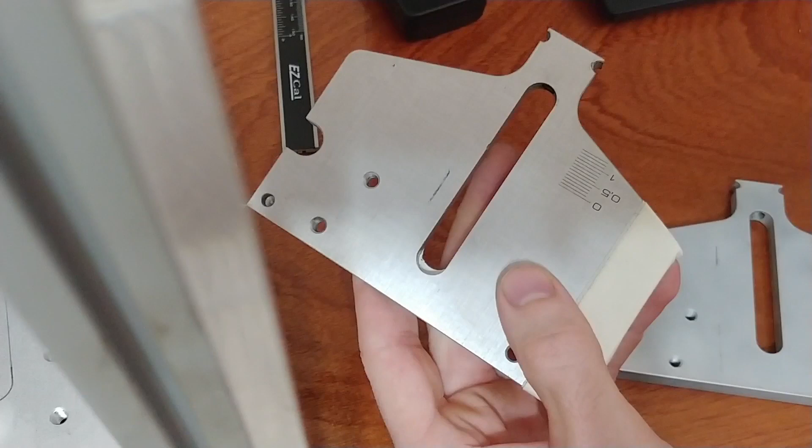I've got a small scale here that I need to mark. It's just a 10 millimeter scale plus a couple extra millimeters. You can see these lines are about 9 millimeters long and the longer lines are 11 millimeters long.

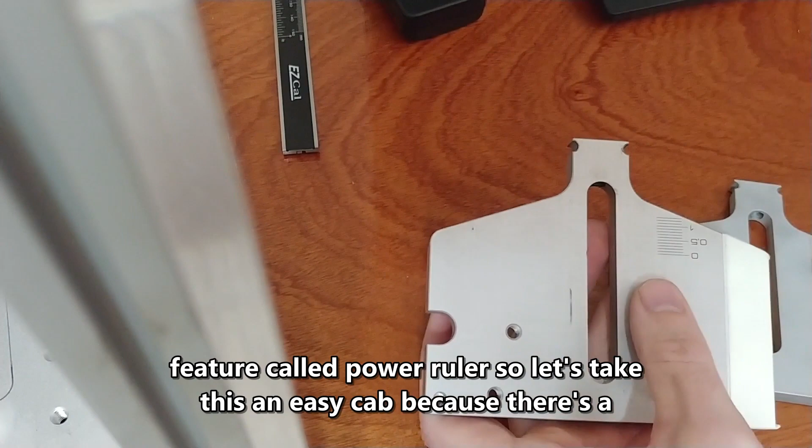So we can do this in EZCAD because there's a feature called PowerRuler. Let's take a look at that and see if it's easy to use or not.

So we go up to the laser menu and we go to PowerRuler, and then what pops up is this little grid. It's essentially a small workspace for EZCAD, with an object list on the left and an XY grid on the right. We have a couple buttons on top to start a new file, to open something, and these will be a .ruler file, so you can save whatever you do in this workspace.

You can click save if you make changes to a current file, or you can save it as a new file and open it later. You can also export whatever you're doing here into your workspace and get out of this little work environment, so you can add different vectors or whatever you need.

For example, for this thing I'm going to need to add a couple more graphics to it. There'll be a logo here, and I'm going to add one more graphic on it, but that's not going to be the only thing marked on it, and I don't want to mark these separately, so this is going to go to the workspace.

As you can see at the bottom of this little environment, you have the light, mark, parameter, and quit buttons, as well as a parts counter. So you could mark directly from here. I haven't had good experience marking from here so far, but I'm not super well versed in this yet.

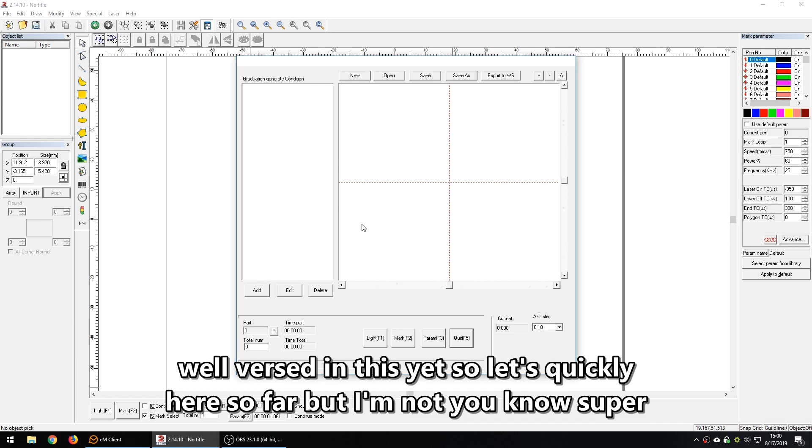So let's quickly look at how we can use this thing to mark a ruler or this little tiny scale. I'm going to do three things: make this scale and mark it, then make a little bit more complicated ruler and mark it, and at the very end make a disc ruler and mark that — that's essentially just a circle.

So let's start by adding some dimensions. I'm going to keep this in view of the camera so we can keep in mind what we're going for. I'm going to orient it exactly like this.

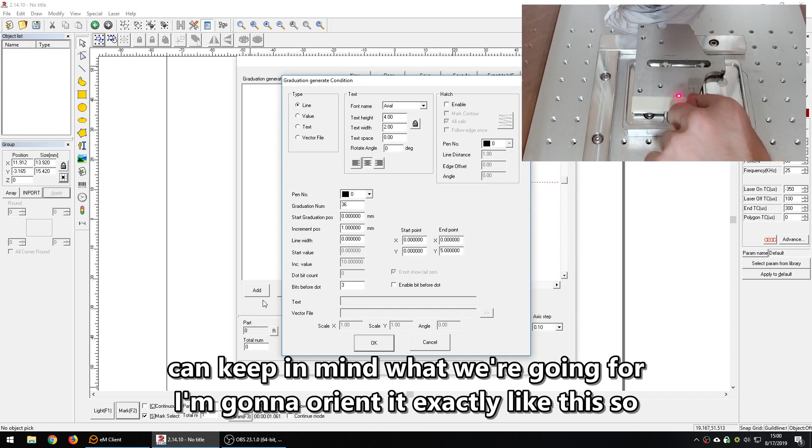You can see when we click on the add button, we have a big screen here with a bunch of options. But mainly on the top we have three boxes, one that says type — this is the type of graphic you're going to add.

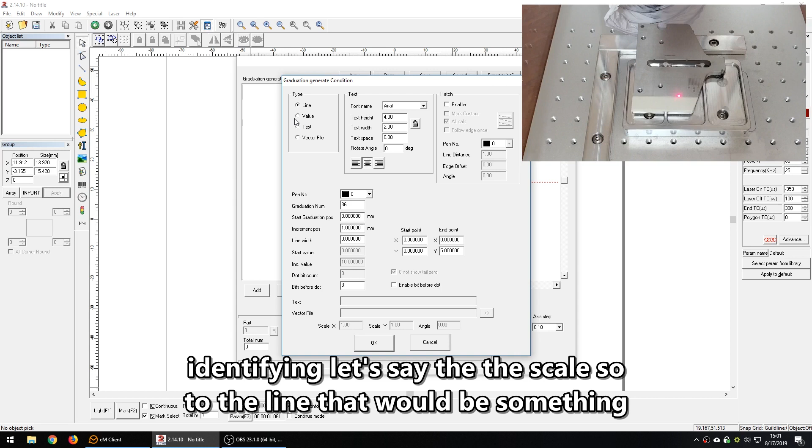Do you just want to add a line? Do you want to add a value to the line — that would be like a number, 0, whatever? Or do you want to add some text to the line — something identifying, let's say, the scale? So if you were making a scale for millimeters, centimeters, maybe something else altogether like bar, PSI, pounds, whatever, you can add that. You can orient it and change the size and the font of it in this second box.

And lastly, on this first box, you can add a vector file. So if you had a logo or something that you wanted to mark in addition, that you wanted to be part of the ruler, you could add that.

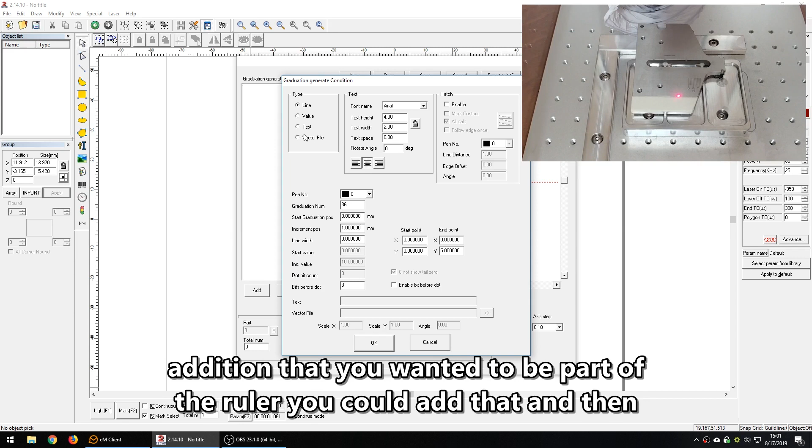This last box here is our friendly hatch box that we're pretty familiar with. If you're not familiar with that, go check out my video on the beginner's guide to hatching, where I go through that in detail. This would just be hatching our letters or our lines as well, because we want them to show up — we don't want them to have 0 thickness.

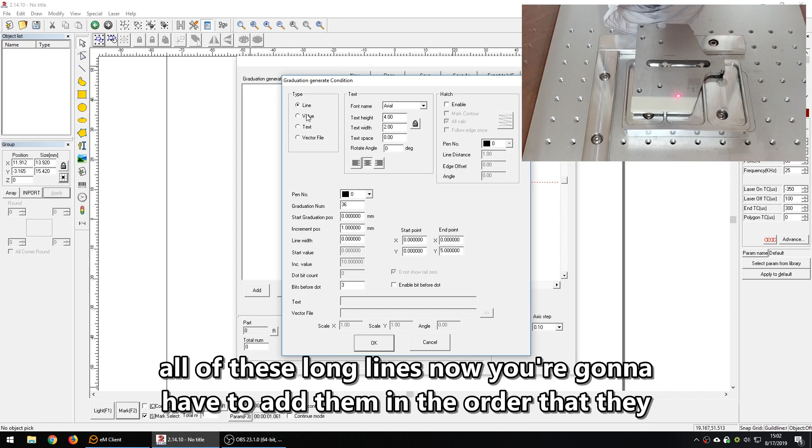So let's take a look at what options we have here. Let's say we're going to add the lines, so that's going to be all of these long lines. Now you're going to have to add them in some kind of order as they show up.

So I've got short lines and I've got long lines, just two different types for this little project. I'm going to start with the lines, starting with the long lines.

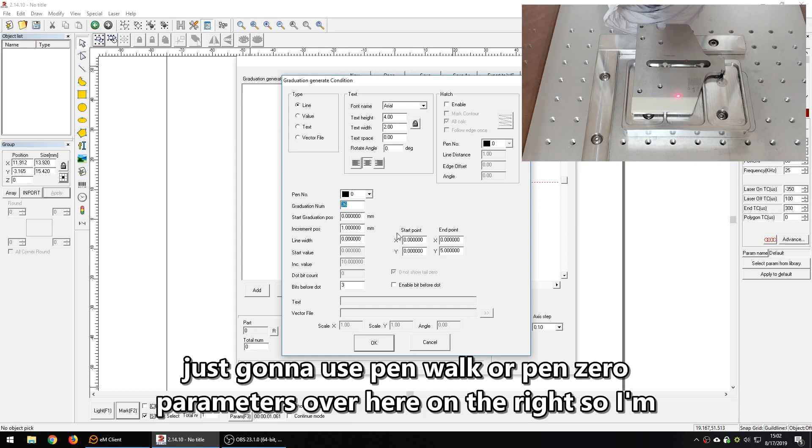So to do that, we have 3 long lines. For the pen number, this is going to be based on your pen on the main parameters over here on the right, so I'm just going to use pen 1 or pen 0, that's fine. For the graduation number, that's how many lines do you want? I want a total of 3 long lines.

Starting position, I want that at the 0 position. Increment position, how often do you want these lines to show up? I want them to show up every 5 millimeters.

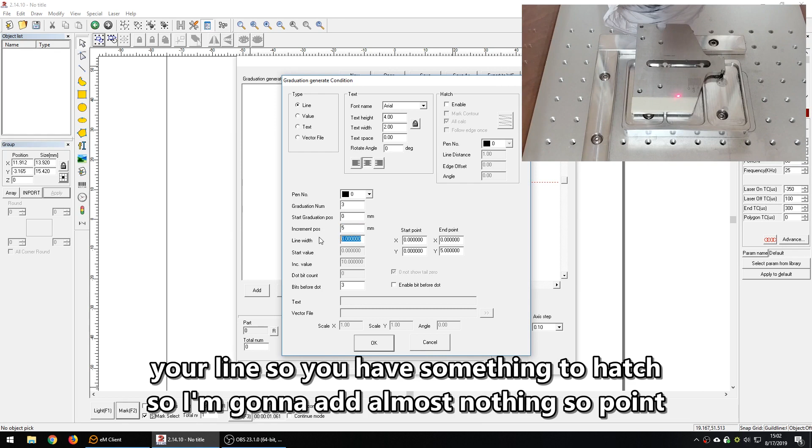Line width, this is where you add a little bit of thickness to your line so you have something to hatch. I'm going to add almost nothing, so 0.05 millimeters is what I'm going to add.

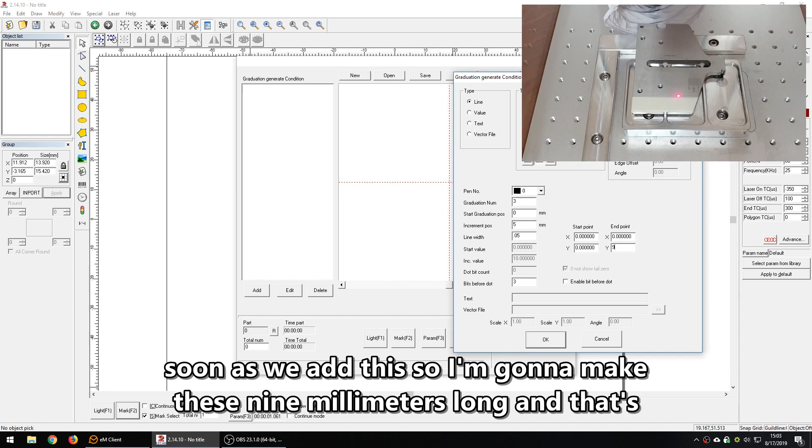Over here on the right where it says start point and end point, this is actually what you're going to do to make your line longer or shorter. It has an X start point and a Y start point. If you wanted to make a diagonal line, you could use both of these values. I'm just going to add a Y value, so we're adding length, adding these lines vertically right on this axis, and you'll see it show up as soon as we add this. I'm going to make these 9 millimeters long, going from Y0 up to Y9, so our X is going to be right on the 0,0 point.

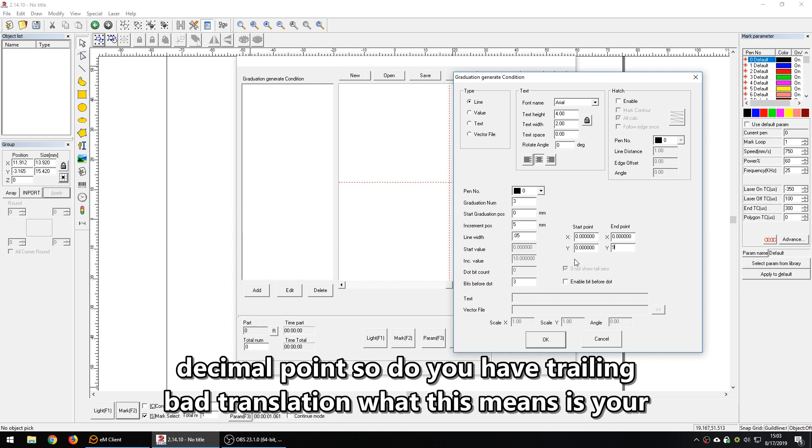Let's take a look at these last few boxes, even though they're not available for the line. We don't have a start value or an increment value, but for the dot bit count, this is just a bad translation - what this means is your decimal point. Do you have trailing zeros after your decimal point? Do you want 5 zeros showing up after your number? And this is just leading zeros - do you want 3 zeros to show up before your number? If you do, you have to click this checkbox.

These last boxes down here are if you're choosing a vector file - you can check these 2 arrows and pull your vector file in, and you can scale it.

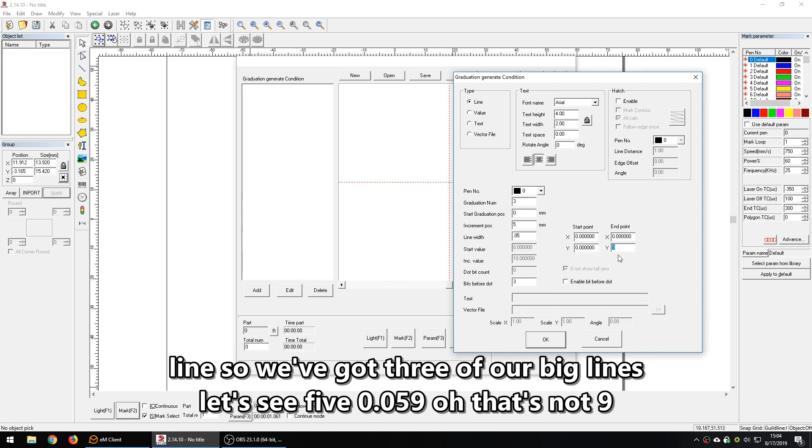So let's go back to our line. We've got 3 of our big lines. Let's see, 5, 0.05, 9... oh, that's not 9, that's 11. But in this case, our top is going to be 0, so actually I did that wrong.

So our Y start point is going to be -2, and our end point is going to be 9, because we want this line to be longer than the others. Now you can do that backwards, but this is the way I'm going to do it.

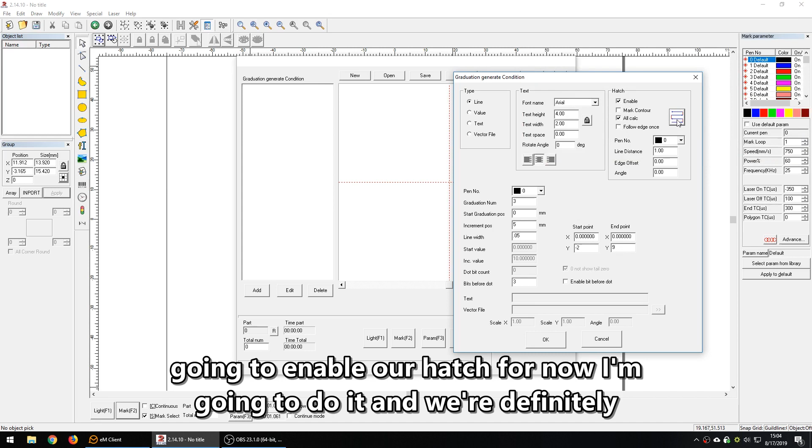We're definitely going to enable our hatch. For now I'm going to choose this because I think it's going to mark the fastest. I'm not going to do all calc because I almost never do that, and the line distance we're going to make 0.01. If you made this too large, nothing would show up because these lines are very small.

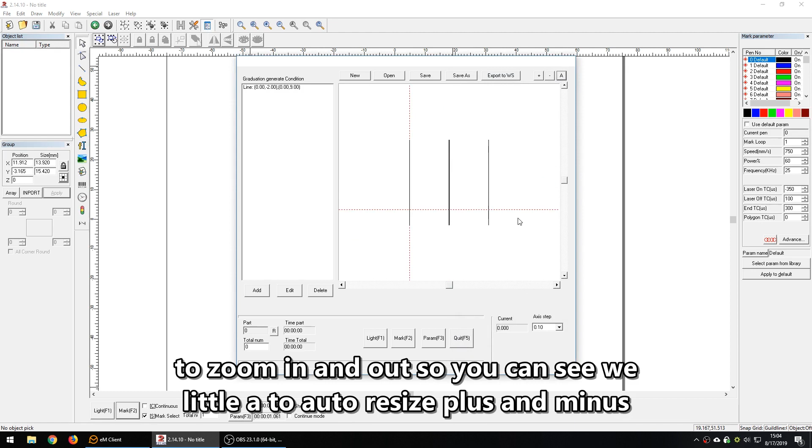So let's say OK. We've got 3 lines on here, let's zoom in a little bit. Notice on the top of the screen you have a little A to auto resize, plus and minus to zoom in and out, so you can see we have a couple lines protruding past our 0 point.

That looks fine. Now let's add some more. We need lines that are now 9 millimeters long, and we have a couple different ways to do this, but I think I'm just going to add them manually.

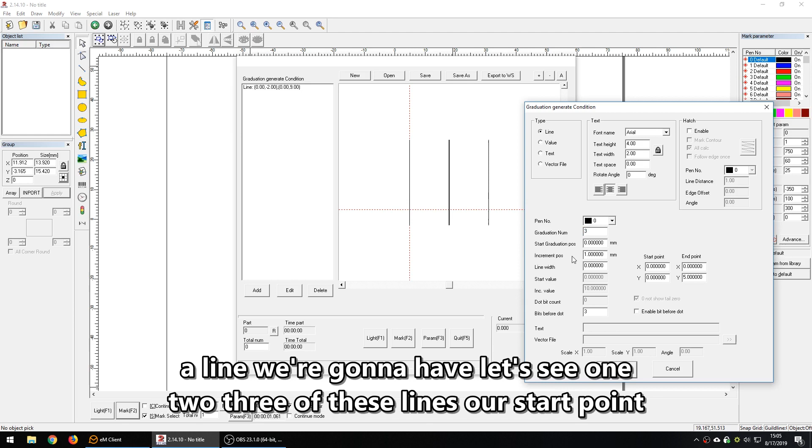So what I'm going to do is choose a line. We're going to have, let's see, 1, 2, 3 of these lines. Our start point is going to be the 1 millimeter line, and we're going to increment by 5 millimeters.

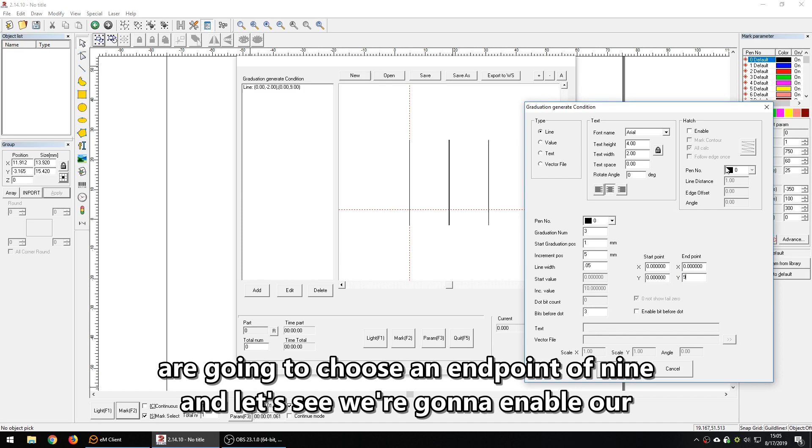We are going to choose the exact same line width of 0.05, and an endpoint of 9. Let's enable our hatch, get rid of all calc, choose the same pattern, and change our distance to 0.01. We'll say OK. And there's our first line.

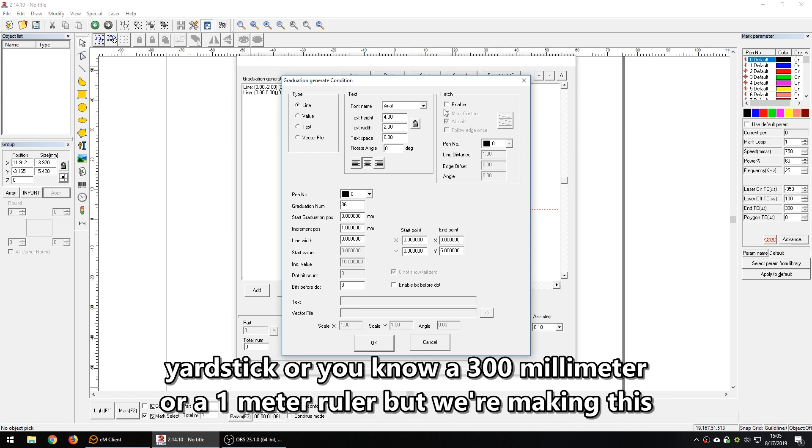And we're going to add another line. You can see this would be a lot faster if we were making a yardstick or a 300 millimeter or 1 meter ruler, but since we're making this small, we're not going to get that much benefit from the way we're setting it up.

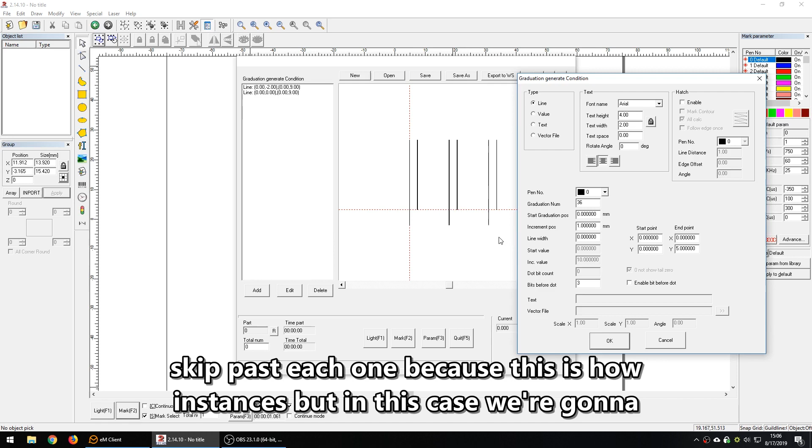But you could also set it up in little batches, so you can make these 9 millimeter long lines starting at position 1, and say I want it to show up for 1 millimeter for 4 instances. But in this case, we're going to skip past each one because this is how you would do it for a longer ruler. So this one's going to have also 3 instances.

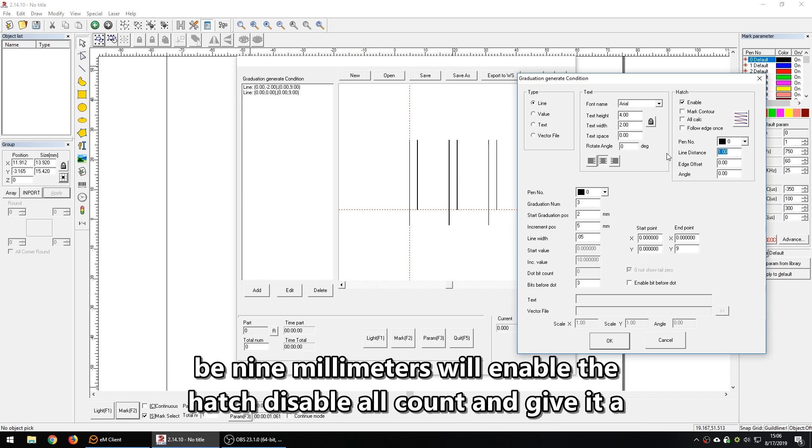Our start point is going to be 2 millimeters. We're going to increment by 5 millimeters, and our width will be exactly the same, 0.05 millimeters. Our end point is going to be 9 millimeters. We'll enable the hatch, disable all calc, and give it a line distance of 0.01 for the hatch. We'll say OK.

Now we have 3 lines. So we need a couple more, and we're going to go to a total of 13 millimeters. So this will be the last line that we're going to make 3 of. Our position is 3 millimeters, incrementing by 5 millimeters, line width...

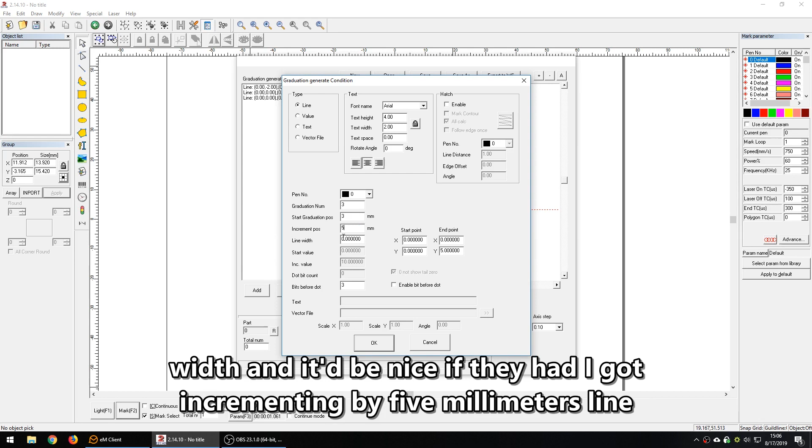It'd be nice if they had a duplicate function over here on the left, but I haven't seen one, so I don't think there is one. I think you have to make these time and time again. Line width is 0.05. Enable, disable, 0.01. And let's use that pattern and change that to a length of 9 millimeters. Say OK.

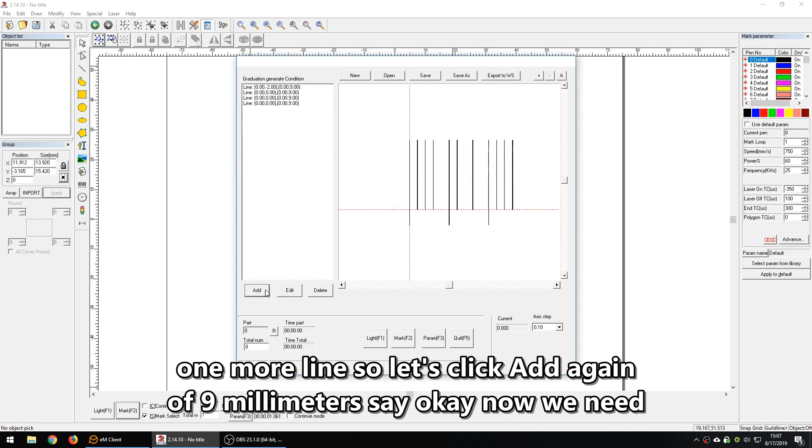Now we need one more line, so let's click add again. This is only going to be 2 instances because we're only going to a total of 13 millimeters. We are going to start at position 4. And we want to increment by... line width is 0.05, no, that's not right. We want to increment by 5, and our position is... this is still going to be a 9 millimeter line.

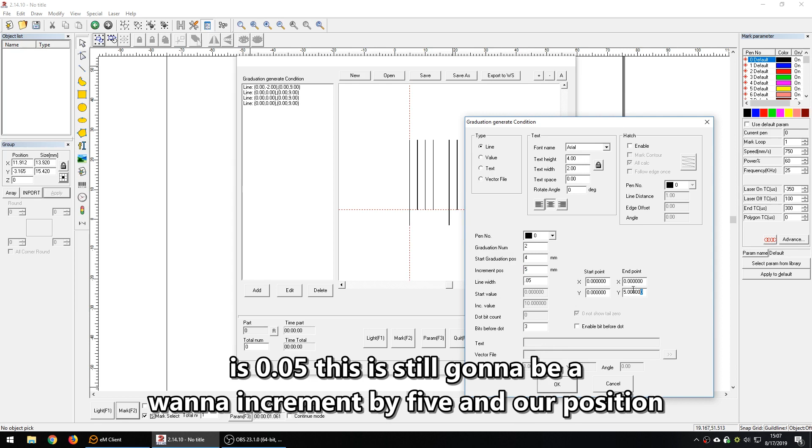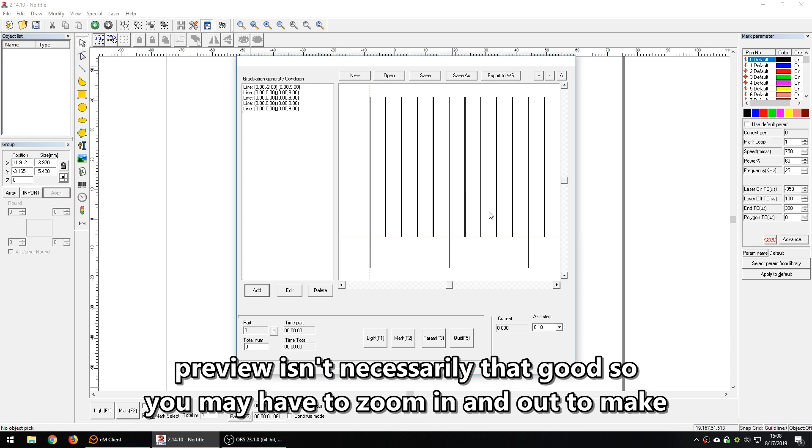We're going to enable the hatch. 0.01. Change the pattern. Did I skip anything? I think that's okay. Okay, we're missing a line there. No, we're not, sometimes they just don't show up. The preview isn't necessarily that good, so you may have to zoom in and out to make sure your lines are there.

Okay, so that's basically our setup, and now we want to add some values to this so we can see what these lines actually represent. To do that, we're just going to click the add button again, except this time we're not going to add a line, we're going to add a value. In this case, it's going to choose a font, we can leave it on Arial. Now the text height is going to be a bit of a guess. You can see that we've got 2 millimeters below this line.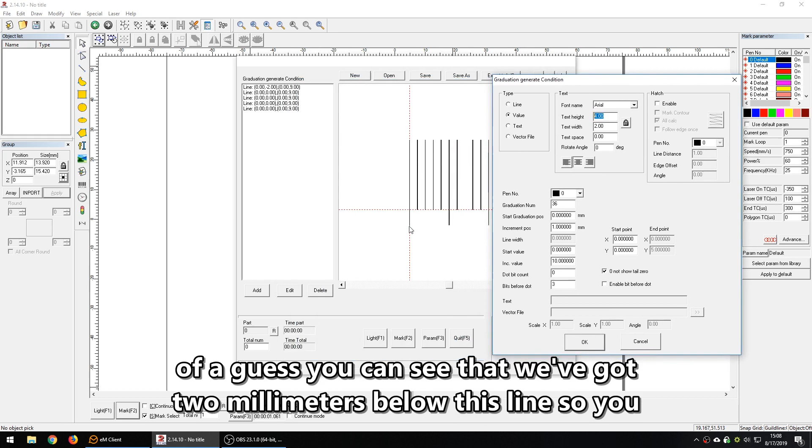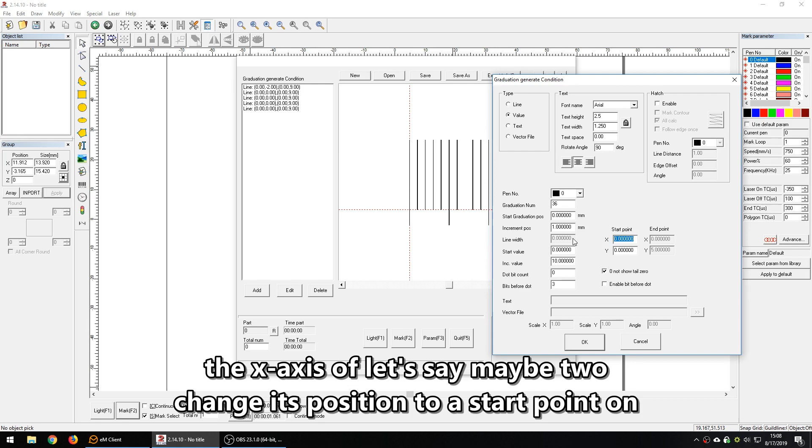So you probably want this, and we do want it to be oriented sideways like this, so I'm going to change this to 90 degrees. And let's say we want our text height, let's just see what 2.5 millimeters looks like. And we want it to kind of be centered, so we want to change its position to a start point on the x-axis of, let's say, maybe 2 millimeters. Let's see what that looks like.

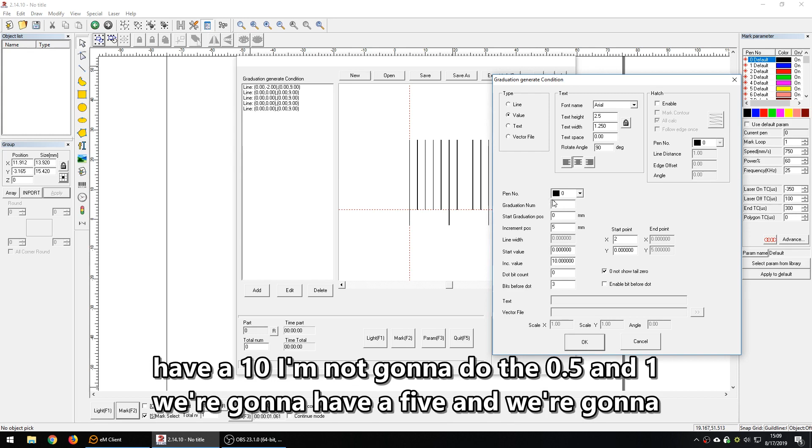So we're going to increment by 5 millimeters, and we're going to start at 0. We're going to have a total of 3 numbers showing up here: we're going to have a 0, a 5, and a 10. I'm not going to do the 0.5 and 1 - I'd rather it not show up in centimeters.

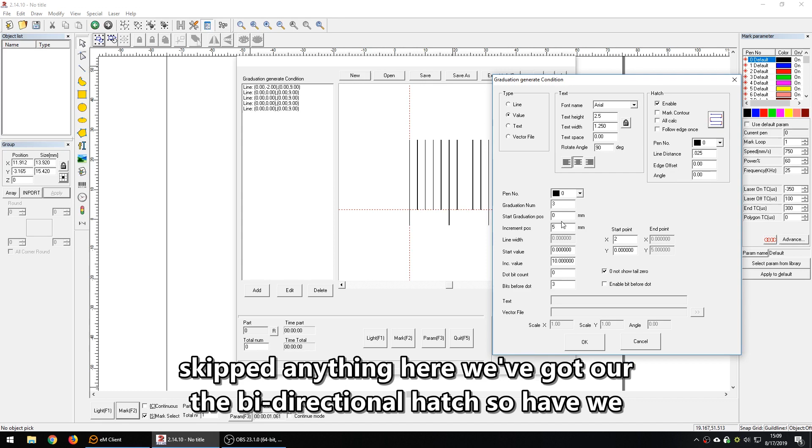And we will have our hatch, and we'll use the exact same values. Maybe we'll use a little bit larger, and we can just use the bidirectional hatch. So have we skipped anything here? We've got our number of positions, our starting position of 0, and we're incrementing by 5 value. Okay, let's see.

Pause for a second here and take a look at this screen.

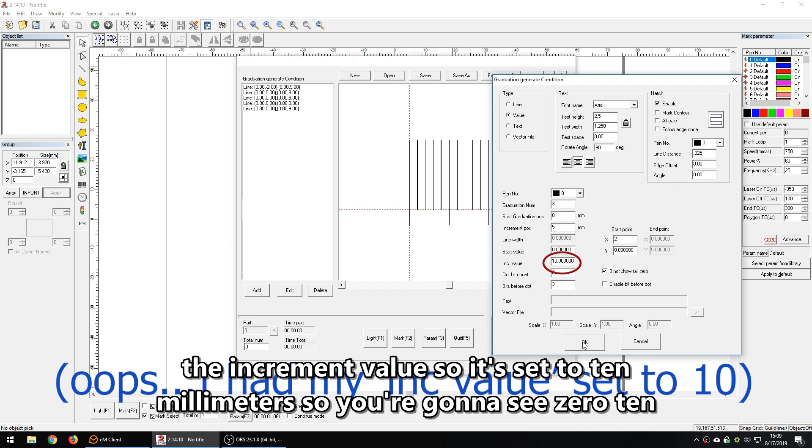So there's an increment value for the actual value, and there's an increment value for the position. I had the position correct of 5 millimeters, but I did not change the increment value, so it's set to 10 millimeters. So you're going to see 0, 10, and 20 instead of what it should be, 0, 5, and I guess 10.

That's there as well, and I didn't notice it because I was paying more attention to the position of the number. That's how it shows up.

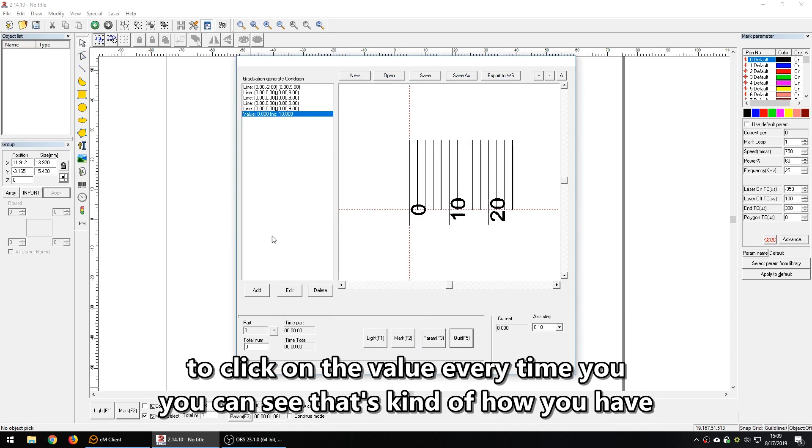All right, so we're not in a good position here. We needed our Y value to go down by at least, I don't know, 3 millimeters. But you can see that's kind of how you have to click on the value every time you want to change it. So click Edit, Y of -3, maybe something like that.

And were we even close on the X? No, it looks like we were too far. Let's give it an X of 1. So that looks a little bit better, but we need to even go further than that. So -3.5, let's do that. All right, that's close enough just for demonstration purposes. And that's essentially all I'm doing there.

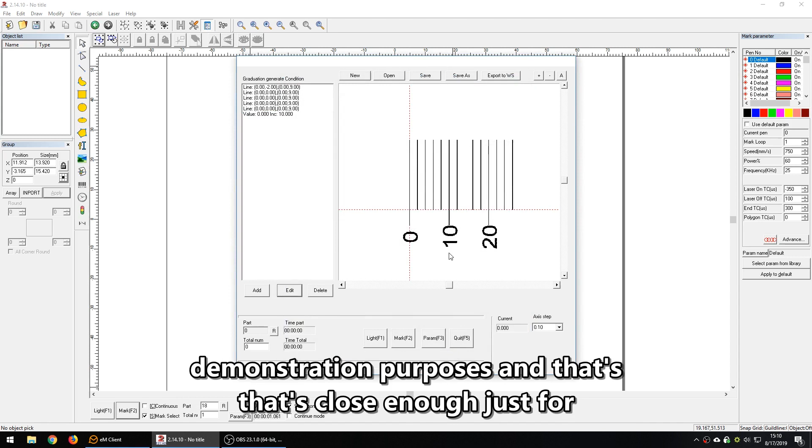So what you want to do when you're happy with what shows up is click Save As, so you don't have to make this again. And what's going to show up is the regular save dialog, and you can see it's a .ruler format. We'll click Save. I already did save it here.

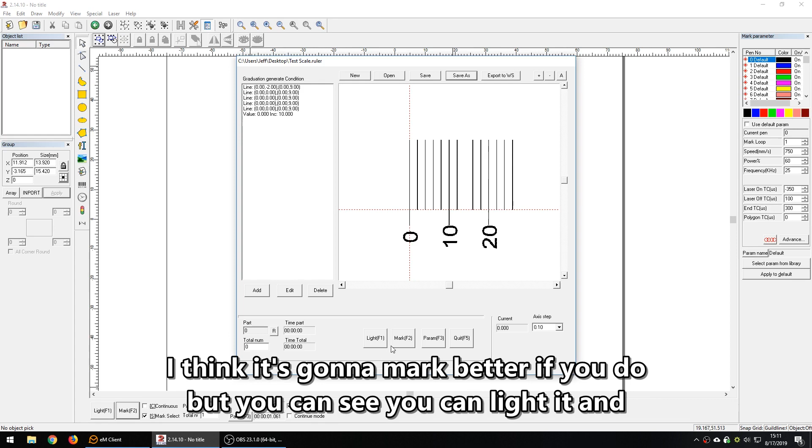So what I'm going to do now is export it to the workspace. You don't have to do that. I think it's going to mark better if you do, but you can see you can light it and mark it from here. I haven't had good results with that so far, but we can light it just to see what it looks like. So that's what you get, a big grid. I don't like that. I'm not going to do it from here.

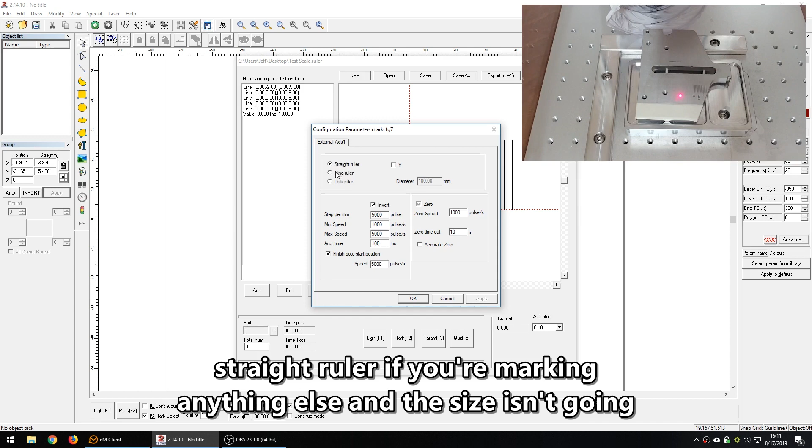Now, we'll come back to this parameter button in a minute to make our other types of marking, but for our purposes, we want to make sure this radio button on the parameter button says straight ruler. If you're marking anything else, the size isn't going to come out correct. So let's say OK, and then let's export it to the workspace.

So there it is. Let's zoom to fit, and you can see our hatching here, and make sure pen number 0 looks okay. So I like these parameters, that looks fine.

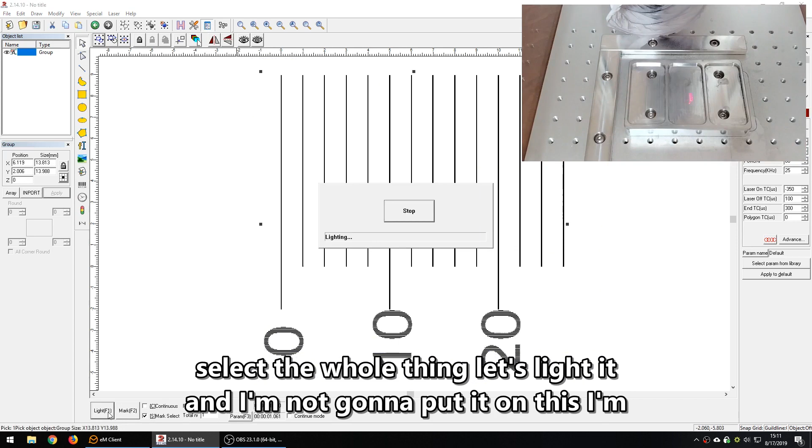Let's select the whole thing. Let's light it, and I'm not going to put it on this. I'm going to get a scrap piece of aluminum. Let's put it on here.

Let's light that. So there it is, and let's mark it. And that's what we have.

And let's just put a ruler on it to see how close our dimensions are. So at an odd angle here. We'll have to pick it up. So that looks pretty close to 13 from my eyes.

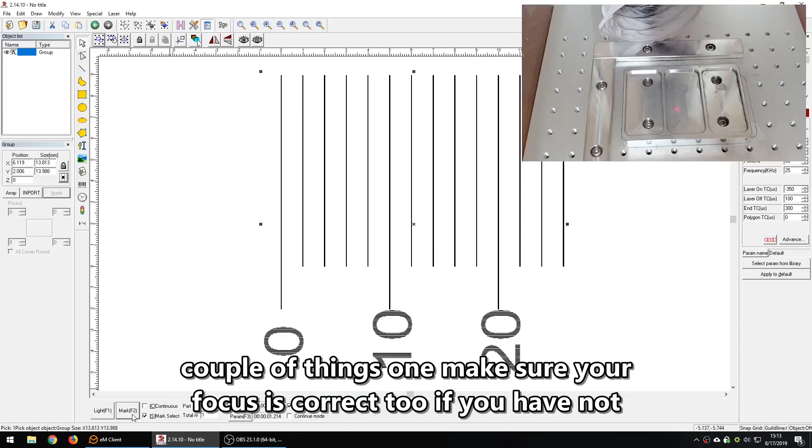Now, if that were off, I would check a couple things. First, make sure your focus is correct. Second, if you have not adjusted for distortion, you can watch my video on that.

I believe it's actually called Adjusting for Distortion. Essentially, it means you're going to have to go into this menu and you'll run through this scale. So if your Y is off, it's going to be Galvo 1. If your X is off, it's going to be Galvo 2. What you're going to do is mark a box and you're going to say, hey, what did it actually measure to?

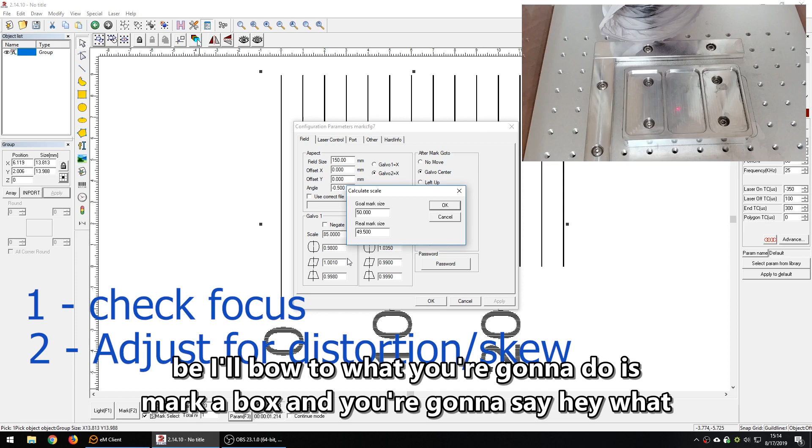So if I draw a 50 millimeter box and it measures to 49.5, then it's going to scale that down to be appropriate to make an adjustment.

Pretty easy. I go through it in that video though, so if you are having issues with that, check it out. Or one last thing, if you go to PowerRuler again, and like I said in the parameter menu, if you have disc ruler checked or anything else checked, your scale could be off. So just make sure you're on straight ruler when you're doing this.

So that's a simple scale that shows you kind of a rundown of making a ruler.

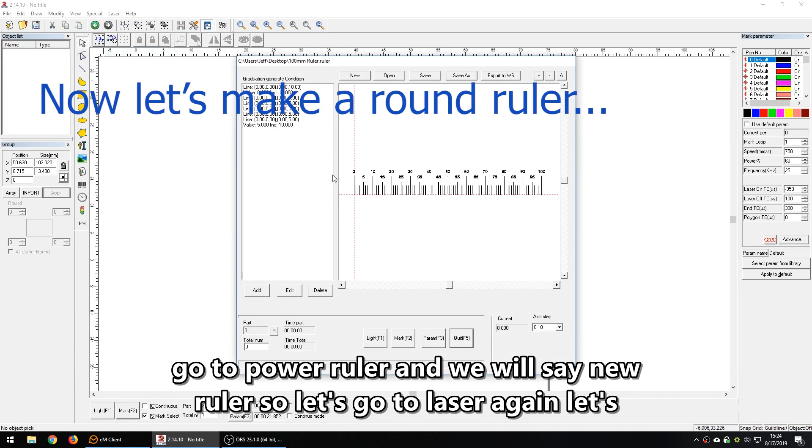So let's go to laser again, let's go to PowerRuler, and we'll say new. Let's go to the parameter button first. Now we'll click disc ruler, and we'll say OK to that. You can set the diameter right here, so let's make it 40 millimeters. Let's pretend we're doing a watch face, maybe the bezel of a watch, so 40 millimeters, maybe that'll be a decent scale.

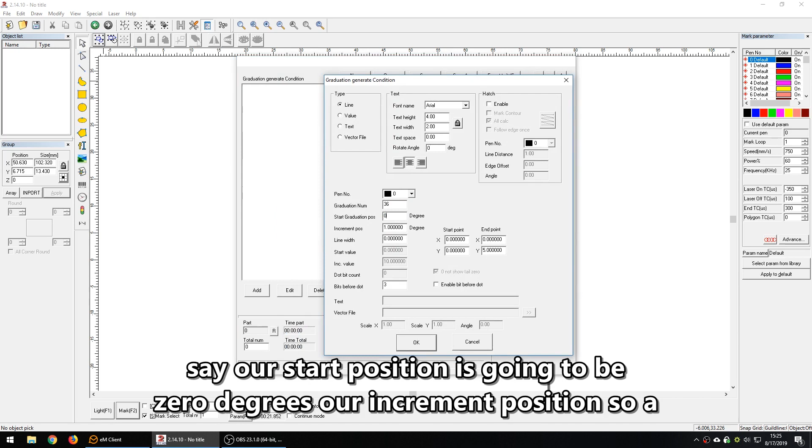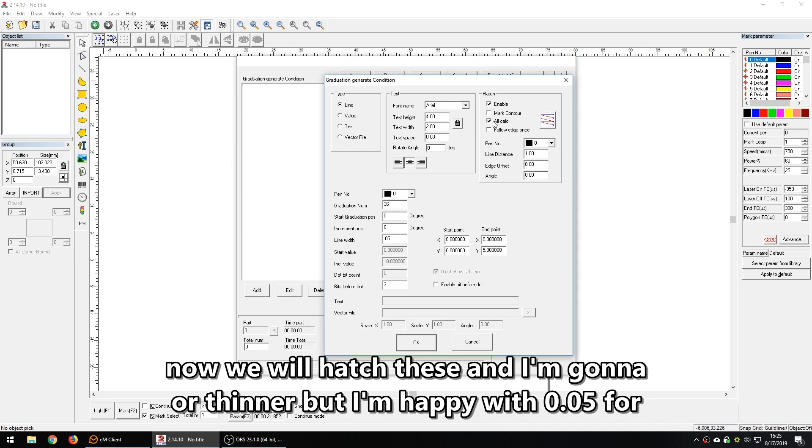And let's add some lines to it just like we did. For the lines, we don't need text right now. Let's say our start position is going to be 0 degrees. Our increment position, so a watch face will have 360 degrees, and we're going to have a total of 60 hash marks. So 360 divided by 60 should be 6, so we're going to have 6 degrees for every increment. Our line width, we're going to make that the exact same thing. We can make it thicker or thinner, but I'm happy with 0.05 for now. We will hatch these, and I'm going to leave the pattern as that, that's fine. So you have to choose a length, let's leave it at 5.

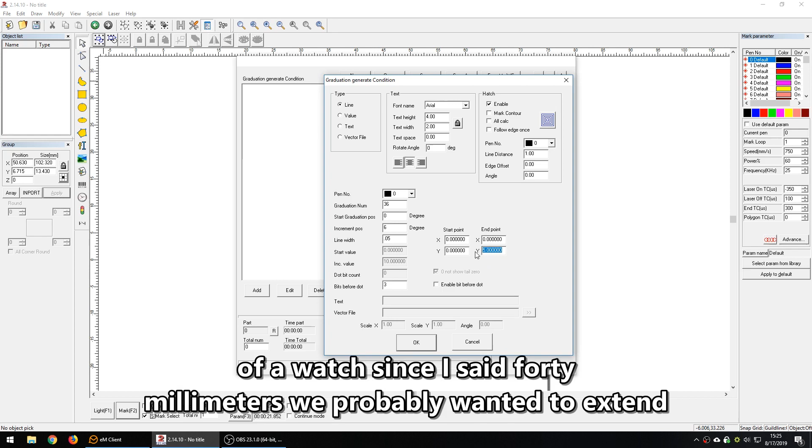Now this is kind of important. For the ring, you actually do want to pay attention to whether you're using a positive or a negative number here - do you want it to extend inward toward the circle or outward from the circle? In the case of a watch, since I said 40 millimeters, we probably want it to extend inward, so let's say -2, or let's say -3 millimeters. Let's say OK to that, and we want a total of 60 marks.

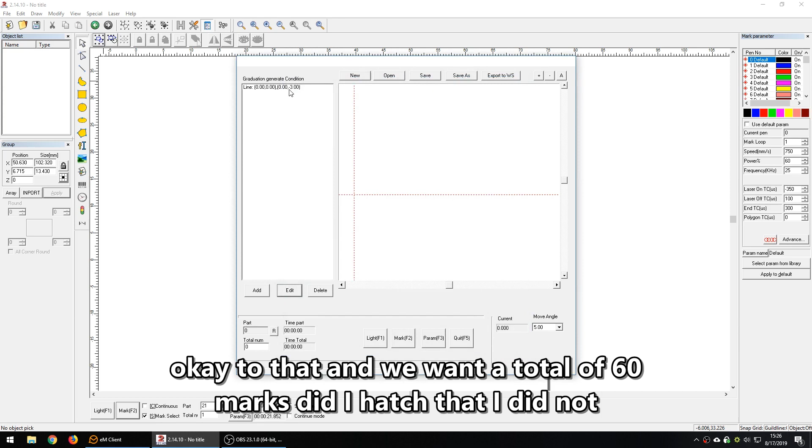Did I hatch that? I did not. No, I did - oh, the hatching is huge. 0.01, so there we go. There's 60 hash marks, and this total outside diameter should measure 40 millimeters.

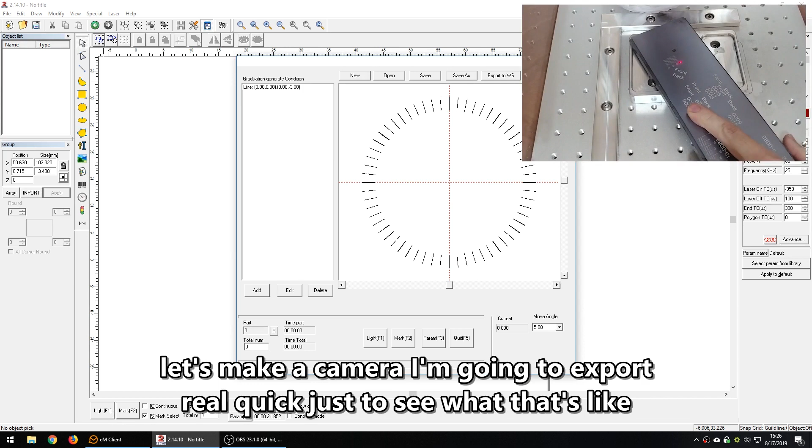We can mark that real quick just to see what it looks like. Let's move the camera. I'm going to export that to the workspace. We'll have to save it as something, so we'll just say 60 marks. Let's zoom to fit, let's light it up. Okay, we're not showing the hash marks, but there we are. And let's mark it.

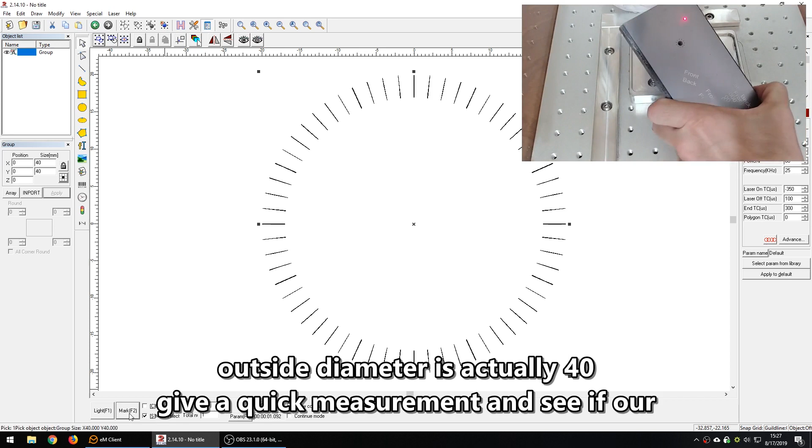Pretty quick, let's give it a quick measurement and see if our outside diameter is actually 40. Certainly looks close to me.

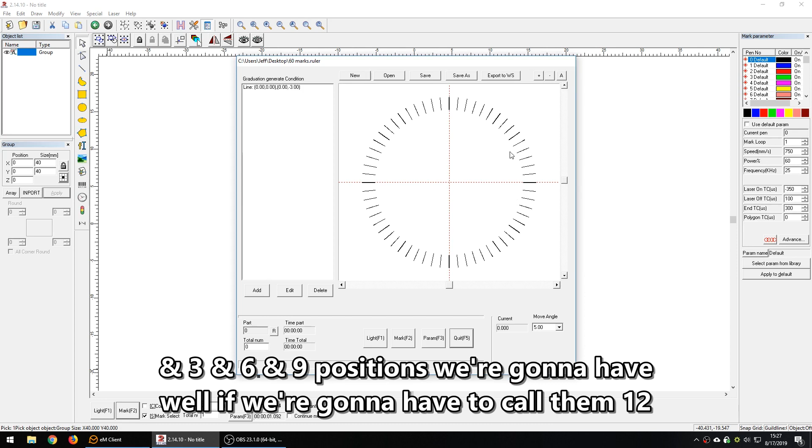Okay, so now let's take a slightly different approach. Go back to PowerRuler. Let's say we want a slightly longer hash mark at the, well if we're going to have to call them the 12 and 3 and 6 and 9 positions, we're going to have to play with the values a little bit because they will orient - so this one's vertical, this one's going to be sideways, and you probably don't want that. So let's edit this.

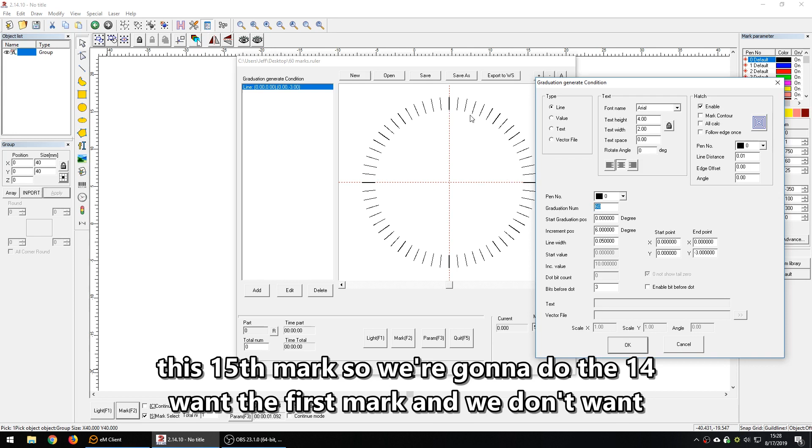Instead of going all the way around, let's just go - let's see, we don't want the first mark and we don't want this 15th mark, so we're going to do the 14 marks in between the two of them. We're going to start at the 6 degree mark, because we said there were 6 degrees. We're going to increment by 6 degrees. We'll keep the line width the same. We'll keep that the same. And that's good, let's go for it.

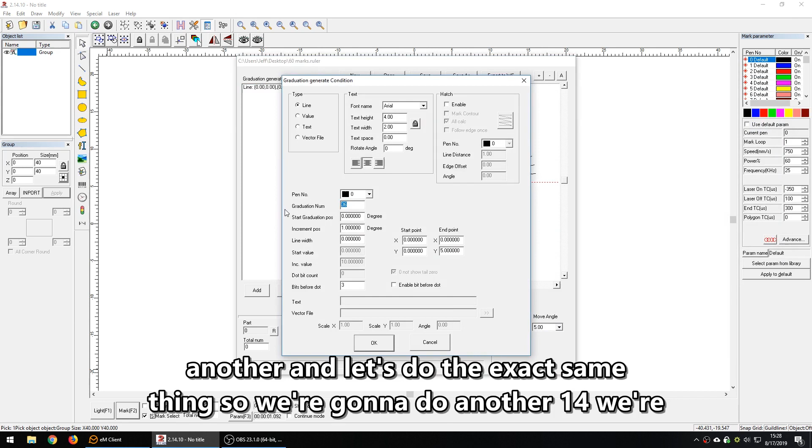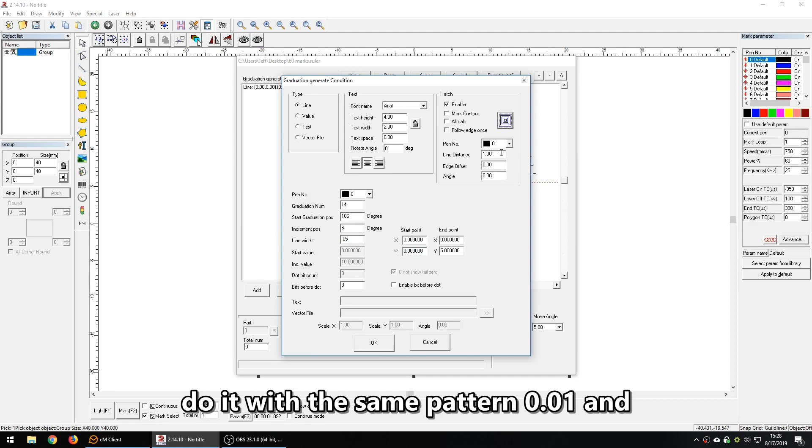Okay, so now we have 14 here. So let's add another, and let's do the exact same thing - we're going to do another 14. We're going to start at, let's see, I guess it would be 180, right? 180 degrees - 186 degrees actually. We're going to increment by 6 degrees. Line width will still be 0.05. We'll still be hatching the line, with the same pattern, 0.01. And we're going to make this the exact same length of 3.

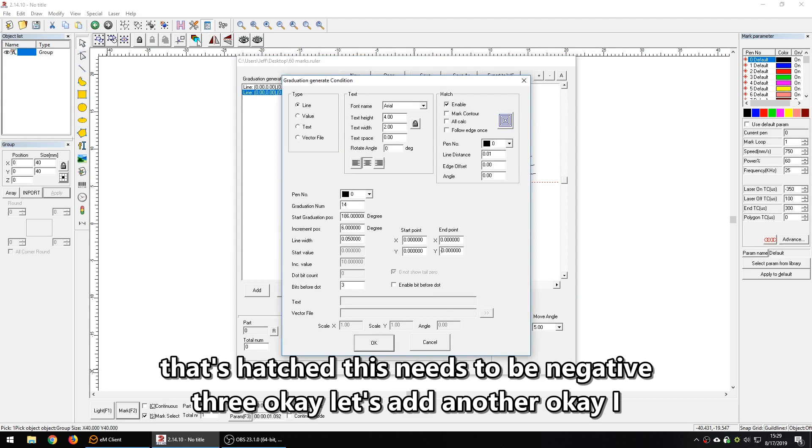Let's say OK. And did we hatch our previous one? That's hatched. That's hatched. This needs to be -3. Okay, let's add another - okay, I guess I was off on my number, 180.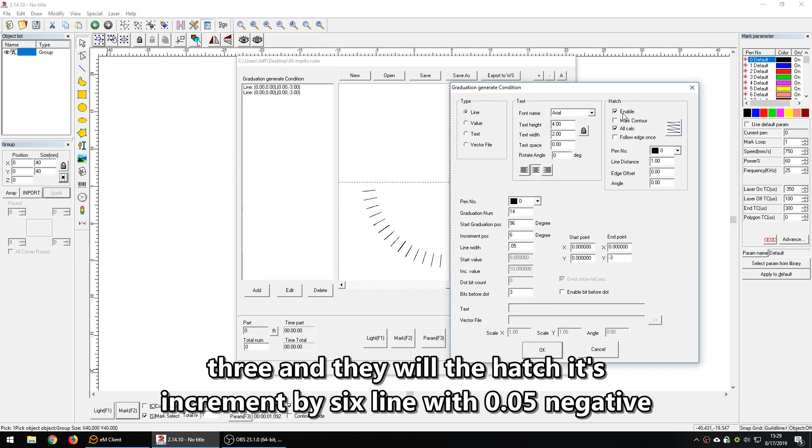So let's go 96 this time - so 14, we're going to start at 96. We're going to increment by 6. Line width 0.05, -3, enable the hatch. It's getting a little tedious at this point, but at least we'll have a full example, and you can see my mistakes as I go. Line distance 0.01 - I think I picked up everything. Let's say OK. So we need one more - I'm going to hope that's 276.

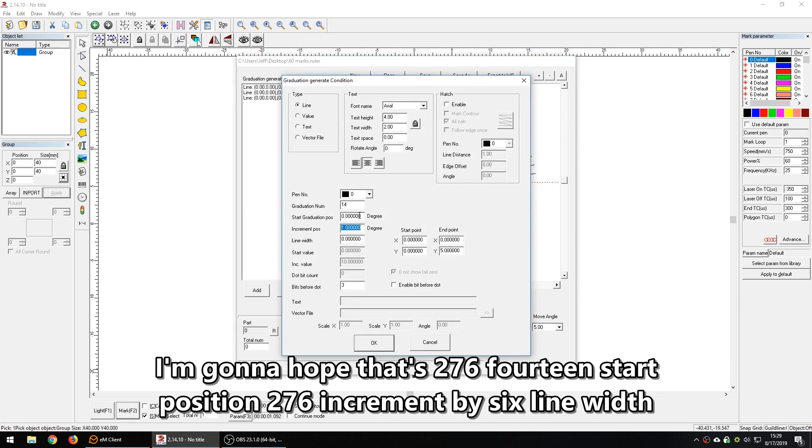Start position 276, increment by 6. Line width of 0.05, keep the length at -3, not -0.3.

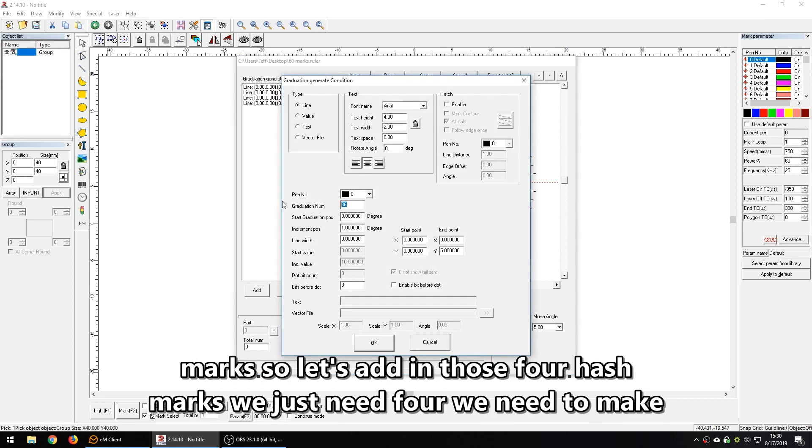Enable at 0.01. Okay, so we have a full circle here, but we're missing 4 hash marks. So let's add in those 4 hash marks. We need to make them a little bit longer, so instead of -3, we'll make them -5.

Let's enable the hatch and keep the same hatch line spacing, keep the same line width, maybe even make it a little bigger. So instead of 0.05, we'll make it 0.07. Increment by, now this one we're going to increment by 90 degrees, and we're going to start at 0.

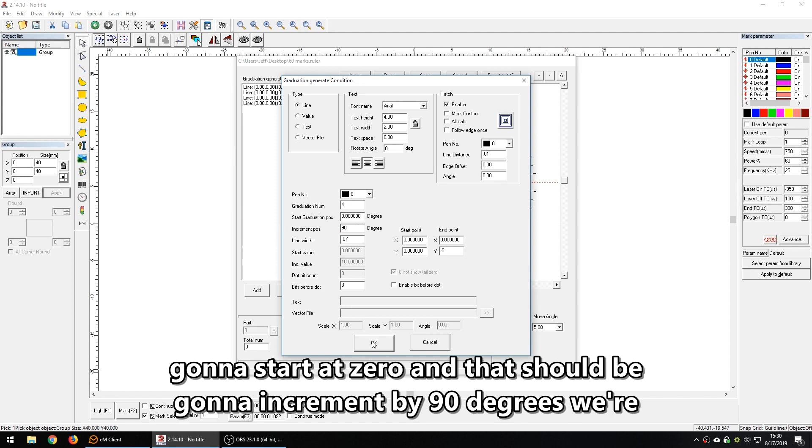That should be good. So now we have our long lines at the 12, 3, 6, 9 position, whatever you want to call it. Maybe we want to add some values in there, maybe beyond it, maybe below it, but you can do that, and you may have to add these sort of individually.

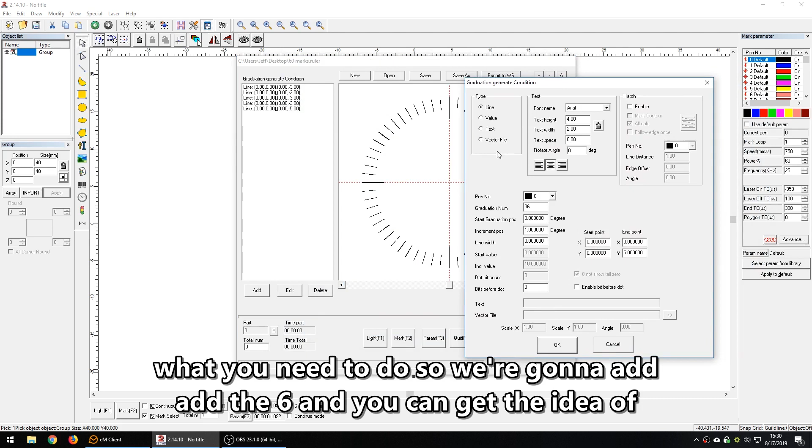So what I'll do here is I'll just add the 12 and I'll add the 6, and you can get the idea of what you need to do. So we're going to add values. This will be text. Let's make it 2 millimeters tall.

That might be too big. That's okay. And then let's put this at the 0 position. We're going to have just two numbers. We're going to start with, let's start with 0.

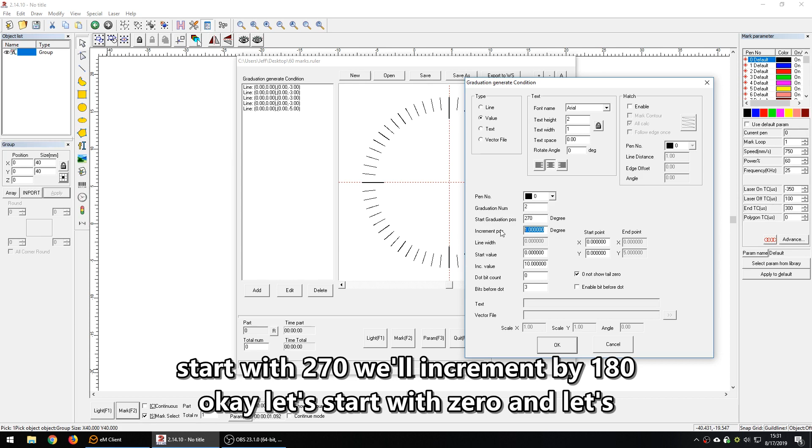270. We'll increment by 180, and we'll put 2 instances. Our start value is going to be, let's say 30, and we're going to increment by 30.

Let's see if that works. I guess we can make that bidirectional since we're talking about text now. And we'll make our line distance 0.025.

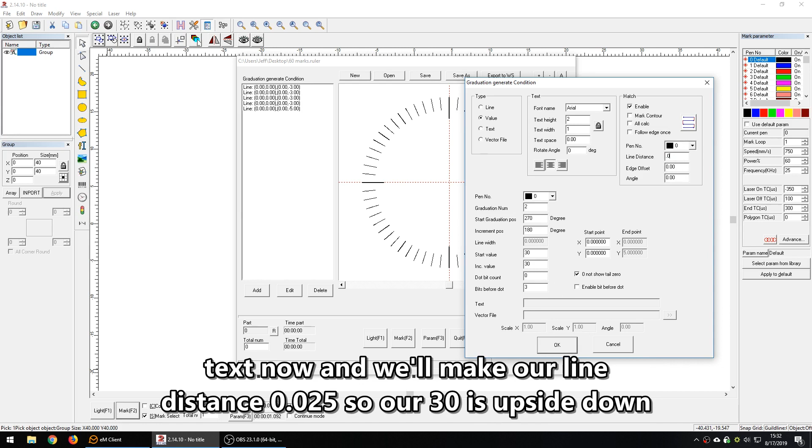So our 30 is upside down. You can see you're going to have to play with this a little bit if you're going to go in a circle, because we probably want these both to be inside rather than outside. And if we had these two other lines, they would also be sideways. So you're going to have to play with this a little bit if you want it to actually look like a watch face or something like that.

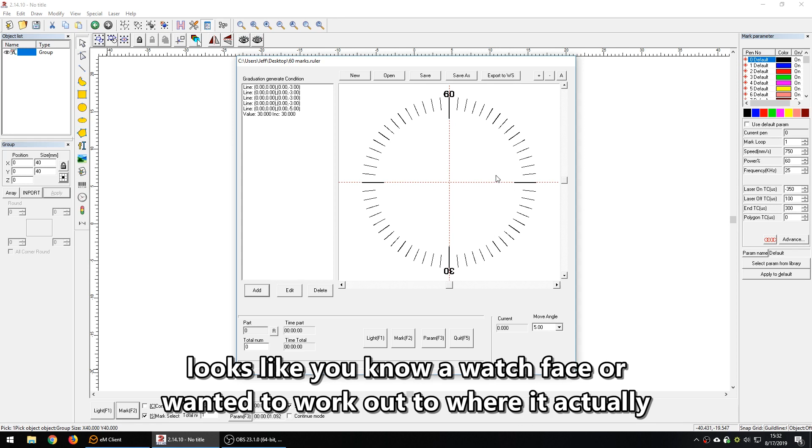But that's the idea of the disc ruler. So we can mark that just for fun to see what it looks like. Let's export it. And that looks fine.

Let's light it up, and then have to do it over top of something. Oh, here's a clean space. And let's just mark that real quick. So there it is, I think that's showing up.

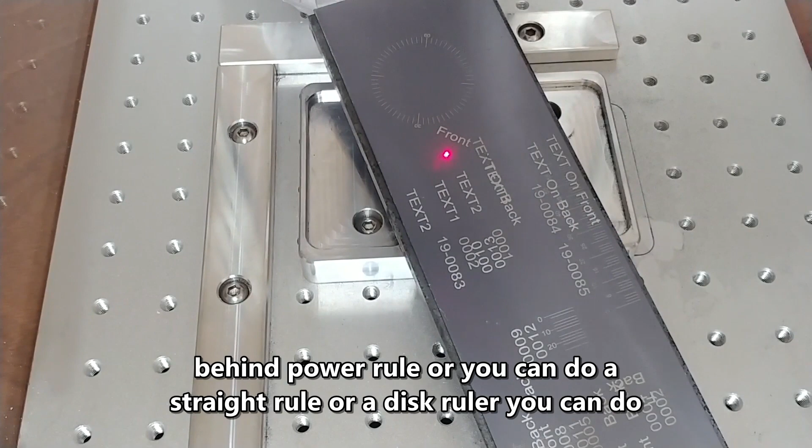Looks alright. So that's the basic idea behind PowerRuler. You can do a straight ruler, a disc ruler. You can do, if you have the rotary, any kind of ring marking, and it seems to work pretty well.

My initial reaction after reading the manual was that this looks pretty complex, and I don't know if I'm actually going to use it. But after using it a couple times, it's not too bad. If you're looking for an easy way to make a scale, I think it's worth a shot.

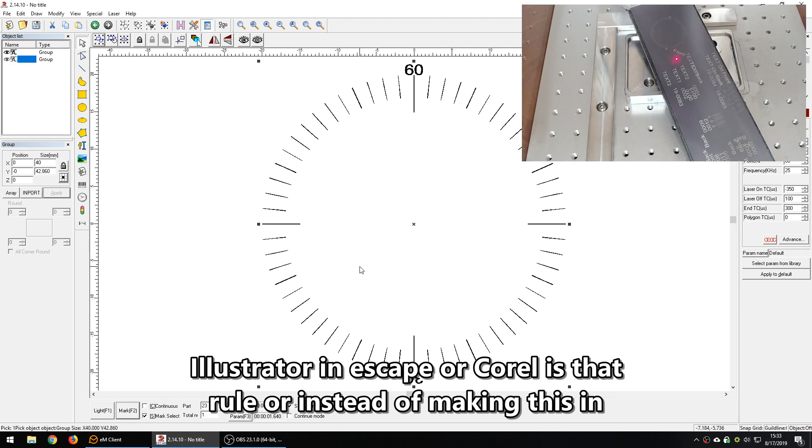Now, the one downside to using the PowerRuler instead of making this in Illustrator, Inkscape, or Corel is that you can't save this as anything but this. So if you do choose to save this, it's going to be an EZD file. So if you ever got another laser or wanted to do something else with this file, you'd have to remake it in another program.

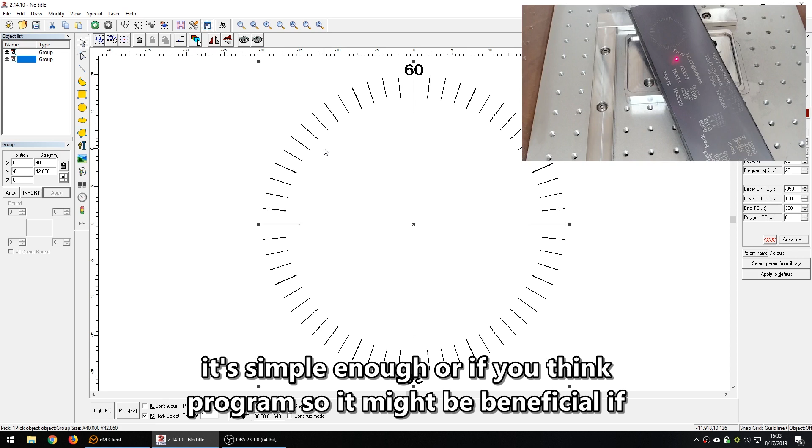So it might be beneficial if it's simple enough, or if you think you're going to use this long term and don't just want to make a quick scale, to make this in a program that's going to last a little bit longer. So it might be nice to have it in an SVG or an AI format. Just something to consider.